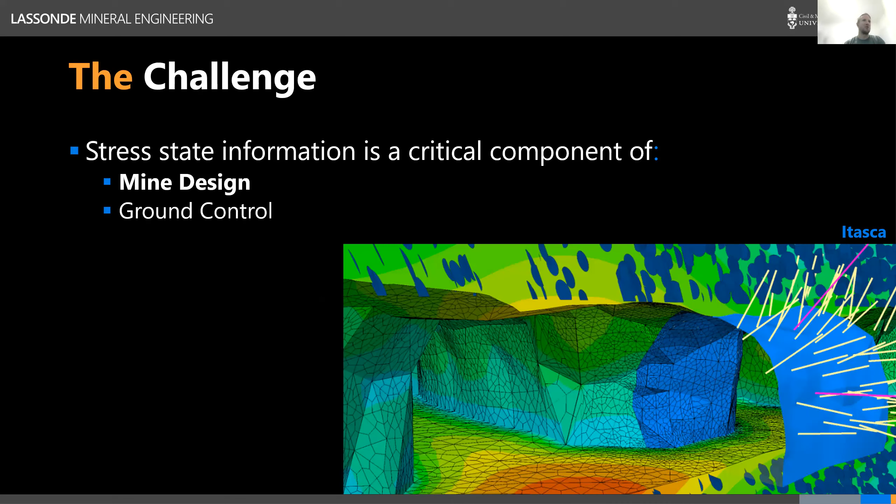So the challenge: stress state information is a critical component of both mine design and ground control. On the mine design side, there are many inputs to numerical models, but stress is a very important one. And you could imagine that the mine that you ended up designing will be very different depending on what the stress state is. On the ground control side, these are images of rock burst events.

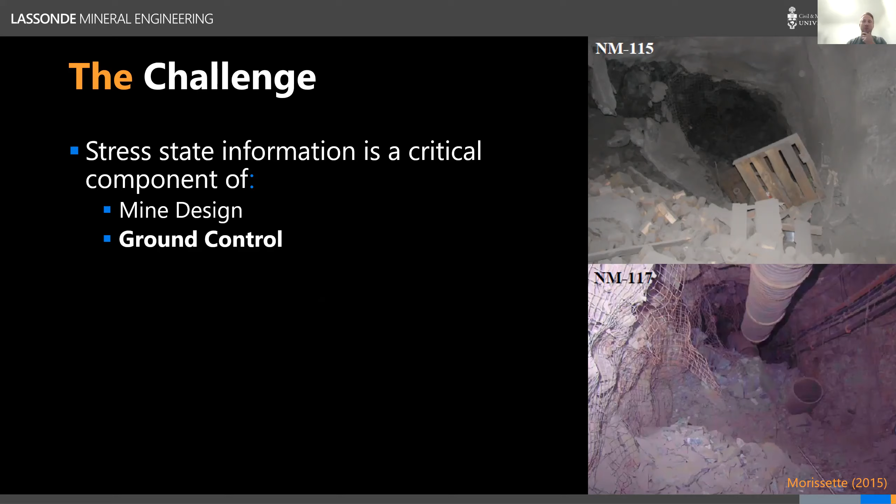So there's sudden and violent collapse of mine infrastructure. And the ground control team is always monitoring available data. This could be microseismic data, extensometer data, making observations and referencing back to the numerical models and trying to avoid these events if possible. And a solid understanding of stress is important for managing these risks to workers in the mine. And stress is traditionally a very challenging property to measure for a few reasons.

One is that it can be highly variable across a volume of interest. So, you might have a far field stress that is compressing a volume of rock, but there are many things that can affect the stress. This could be geological structures, mine infrastructure, contrast in rock type. And so all of this makes it hard to quantify the variability with point measurements.

And a lot of the available methods can have high levels of uncertainty. As I mentioned, they can be sparse, and they can have low levels of success, be time consuming and financially expensive. So probably the standard method is overcoring, which from my experience forms the basis for most understanding of stress in mines that I've worked with.

Another method is the acoustic emission Kaiser effect method. There are two groups out of Australia that do this. And basically what they do is they take a core sample out of the borehole and they drill, I think, 6 smaller boreholes at different orientations out of that core. And then they do uniaxial compression experiments on each of those small cores.

And they measure the cumulative acoustic emission hit rate. And for each orientation, they extract the uniaxial stress where the AE starts to increase more rapidly. And then they put this into an inversion to extract the stress state. I've seen it used at a couple of mines in Sudbury.

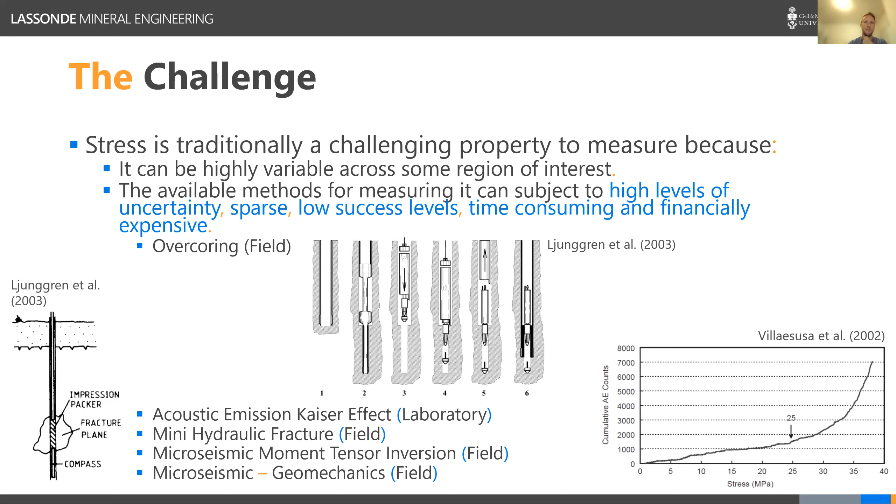One of the big challenges with it is that, as you can see from this plot, it's not entirely obvious where the acoustic emission hit rate is really taking off. And so there's some uncertainty when picking that value. Mini hydrofrac is another method. And then ESG Solutions out of Kingston, I believe they have a method to infer stress from the microseismic moment tensor.

And so this is data from the Underground Research Lab. This was a test site for the storage of Canada's waste uranium in the Canadian Shield in Manitoba. And it was kind of like this really cool underground research lab. And they were working in a fairly small volume of rock, and they were trying to quantify stress. And so this is showing the stresses from 100 overcoring measurements in a relatively small space.

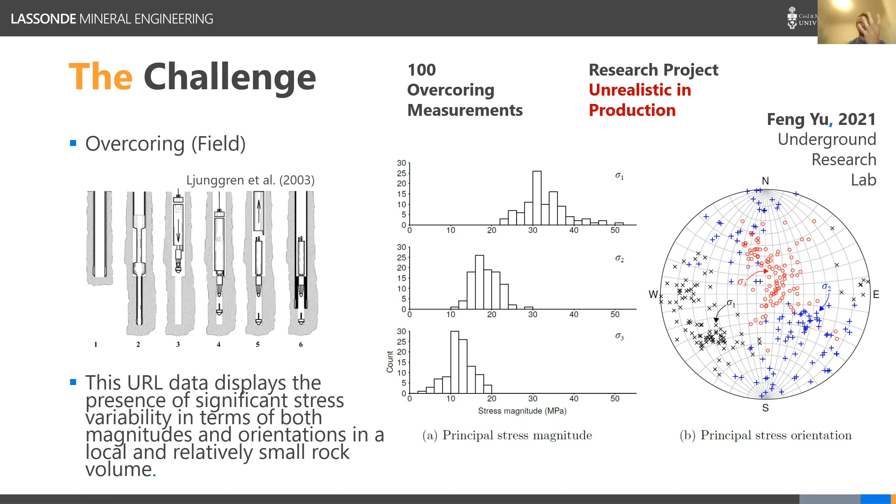And so you can see that there's quite a lot of variability in both the orientations and the magnitudes. And so you could imagine that if you were just picking one overcoring measurement to characterize a stress state in your mine, there might be quite a lot of bias in that measurement. And so this is one of the challenges that we're trying to address. We're trying to address it with ATV data. So I'll talk a bit about what that is.

So ATV data is a type of wireline logging technology. Wireline logging, this is a setup for that. So here you can see the steel casing at the top of the borehole. Usually there's a tripod and there's a winch in the truck. And basically this cable is supporting a probe, which is slowly being lowered down the borehole. The cable not only is supporting the probe, but it is also providing power to the probe and relaying data from the probe back into a laptop that's located in this truck.

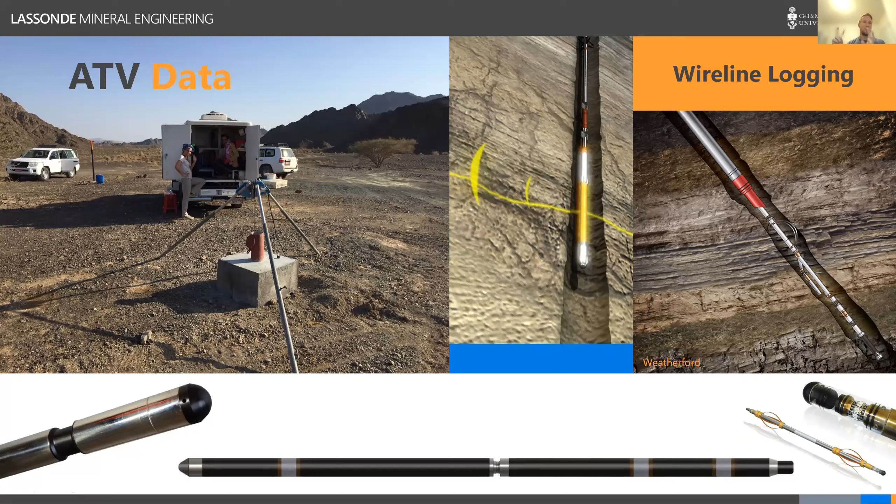Wireline logging is used in the mining industry during exploration, geotechnical logging for mining, as well as in the oil and gas industry. Common physical properties that probes are designed to measure would be resistivity, magnetic susceptibility, gamma radiation, density, and sonic velocity. And there are two types of probes called televiewer probes.

So there is an acoustic televiewer and there is an optical televiewer. And these are images of both of those. And the type of data that they create is shown on the right. So the first two images where it says amplitude 1 and amplitude 2, those are from the acoustic televiewer. And then optical on the right, that's from the optical sensor.

So the optical probe can work in a wet or a dry borehole. And you can see there's little LED lights there that would light up the inside of the borehole. And then you basically just have a rotating camera taking a panoramic image inside the borehole. The acoustic televiewer is using an ultrasonic pulse to image the borehole wall. And so it needs the borehole to be fluid filled.

And on the right-hand side, you can see from the optical, you've seen this vein structure, some fractures, and you can look at it in an unwrapped or wrapped view. And the wrapped view basically just looks like a piece of core. So this would be the mirror image of the core that you extracted from the hole.

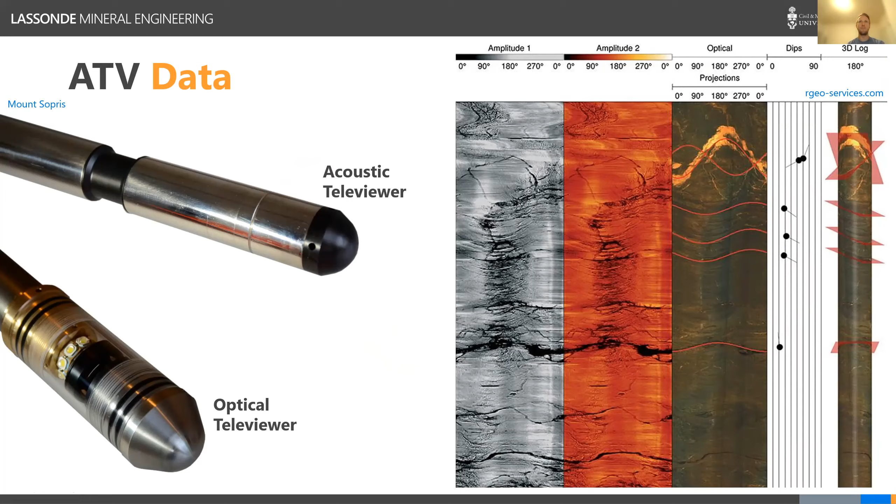For the acoustic televiewer, what it does is it obtains a high resolution oriented acoustic image of the borehole wall and does this by transmitting an ultrasonic pulse, which travels through the fluid, reflects off of the borehole wall, and then that full reflected waveform is recorded by the sensor. This little hole here at the bottom of the probe, that's where the ultrasonic pulse comes out of. And that's where the ultrasonic pulse is recorded. And this rotates 360 degrees at each depth increment.

And so the two features that we generally extract from the raw waveform data is the travel time. So that's how long did it take for this wave to travel through the fluid, reflect off the wall, and come back. And then the amplitude, the maximum amplitude of the reflected wave. And what happens here is that some of the energy from the incident wave is transmitted through the rock and some of it is reflected.

And so if we had a broken out zone of the borehole or maybe an open fracture or fault, this would result in a longer travel time, right? It would take longer for that wave to travel through the fluid and back to the sensor. And as well, we now have this kind of broken out area around the borehole, which is absorbing and scattering ultrasonic energy, which is resulting in a smaller amplitude of the reflected wave. So these are the two ways that we can image these features on the borehole wall.

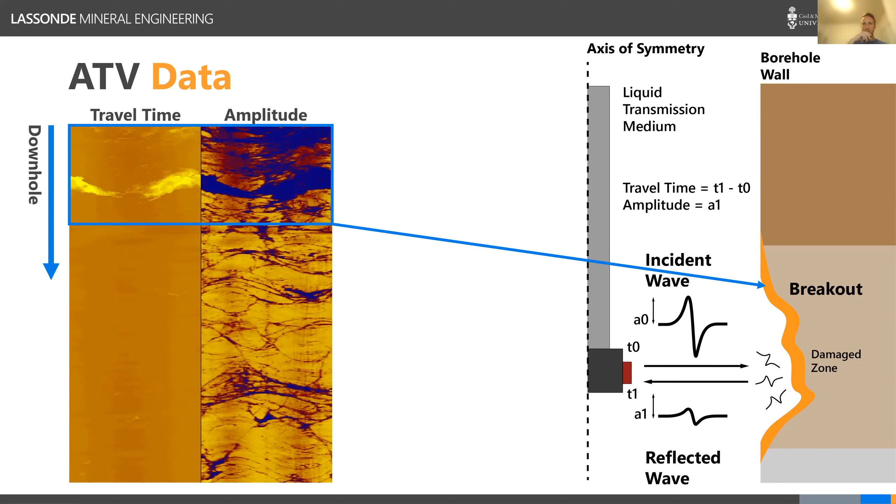And so this is an image showing an open fracture, both in the travel time view and the amplitude view. The more bright yellow areas are longer travel times. And then the darker purple areas are smaller reflected amplitudes. So this open fracture is, the signal is traveling into it, taking a longer time to reflect back. And as well, it is absorbing more energy through different mechanisms of attenuation.

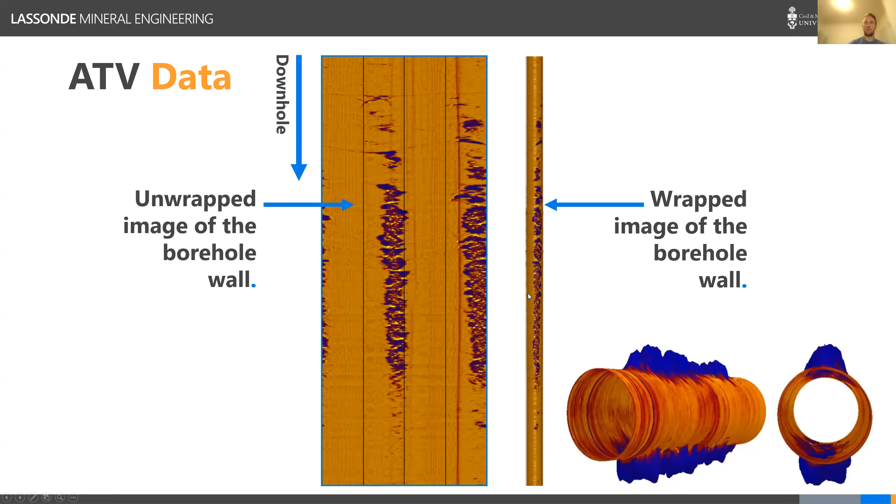So we can view this data in two views. There's the unwrapped view, and you'll see this a lot in the presentation. The y-axis is kind of the depth axis. So the top of the borehole is at the top left corner. The bottom of the borehole is at the bottom left corner. And then the x-axis is kind of the circumferential angle, right? So essentially top left corner is 0 degrees and the top right corner is 360 degrees. And you can look at it in a wrapped view as well. So that's what the raw data looks like in terms of travel time and amplitude.

And what happens is this raw data goes to a company like DGI, and DGI has a bunch of data analysts who will actually extract features manually from these images. So one of the features they extract is the borehole breakout. So this is done by drawing a rectangle basically around these breakout features. So the rectangle will have a distance downhole, it'll have an angle, it'll have a length, and it'll have a width. And this image here is just showing what a breakout would actually look like.

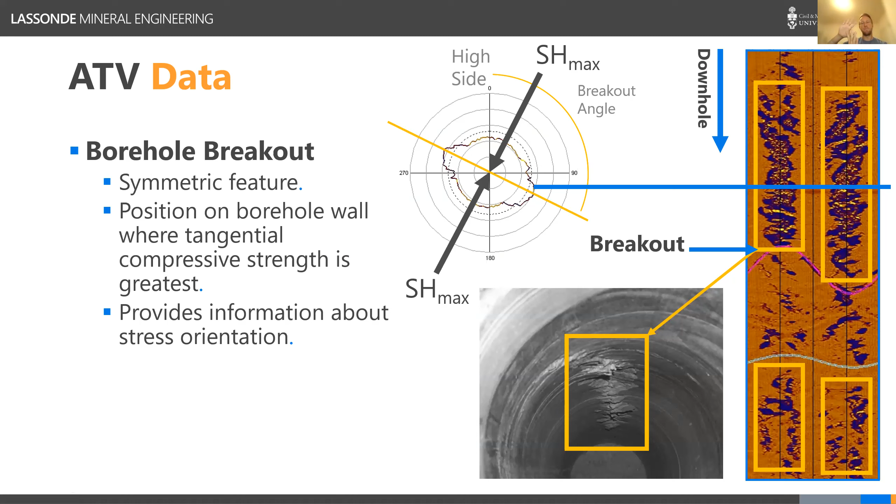And what we see is that these breakouts are typically symmetric, and they are occurring at 90 degrees to the maximum horizontal stress in the plane perpendicular to the borehole. So it tells us something about, you know, the stress relative to that borehole coordinate system.

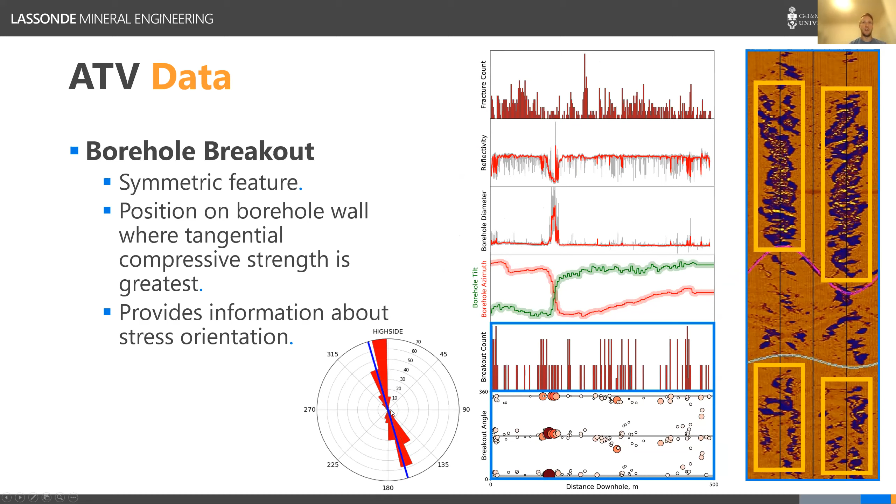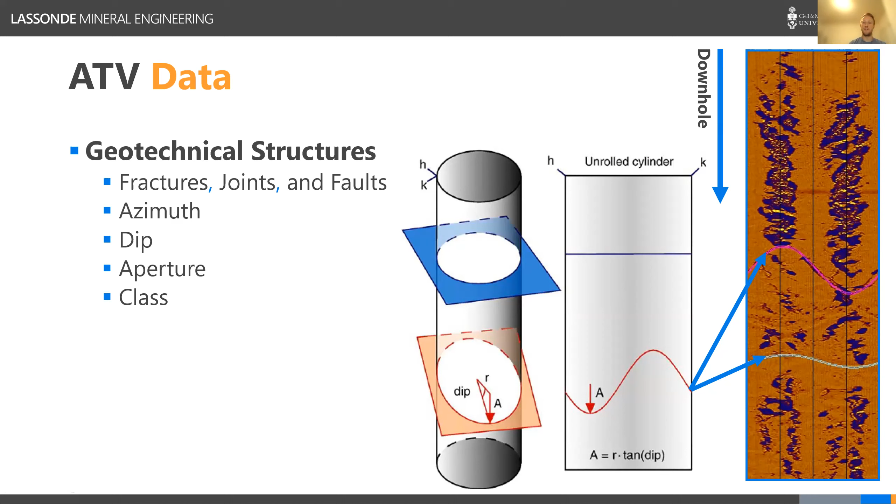Another feature is geotechnical structure, so fractures, bedding, joints, and faults. When a plane intersects a cylinder and you unwrap that cylinder, it's expressed as a sinusoid. And so what the analysts will do using a software called WellCAD is they'll manually fit these sine waves to the breakout features. Because the acoustic televiewer image is oriented, they can get out the true azimuth and dip and aperture of all of these structures.

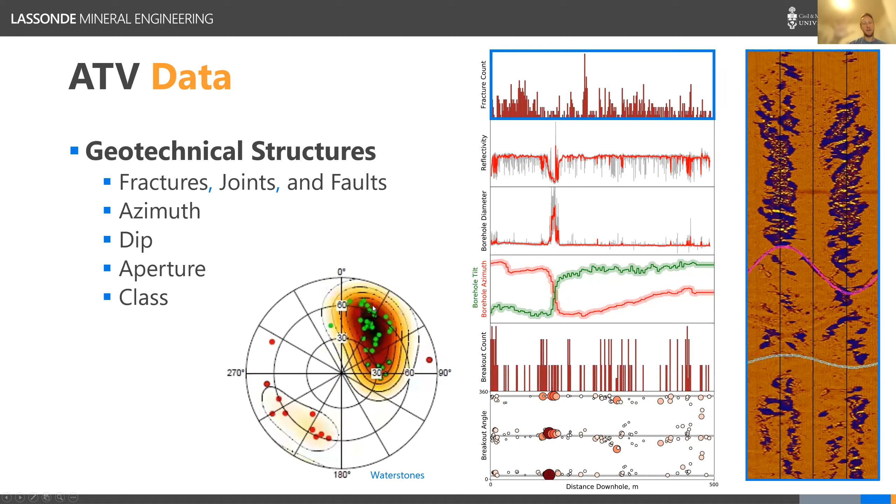And we can look at them in a summary view over the length of the borehole. So maybe I'm looking for areas where there are lots of fractures or not so many fractures. And we can also look at a polar or Schmidt plot to see if there are any dominant trends across the data set.

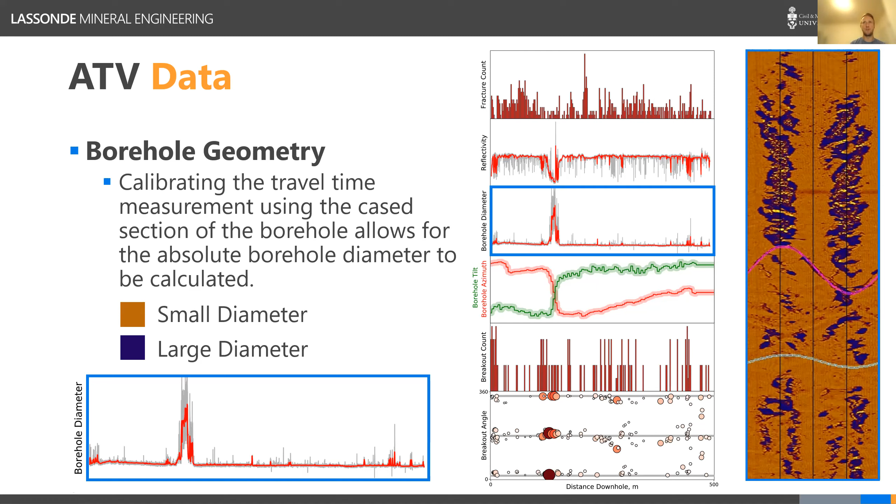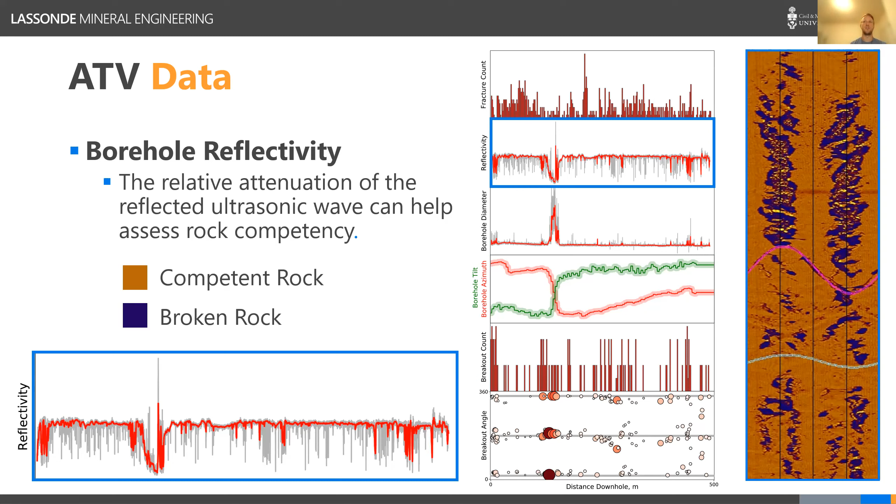Reflectivity is basically at every depth point, they just take the average of all of the amplitudes around all 360 degrees. Competent rock would be the brownish colors, broken rock would be the purple colors. And again, we can use this to look for areas where the borehole is significantly broken out and is absorbing a lot of that ultrasonic energy that the sensor is transmitting towards it.

And lastly, there's just the survey data. So all these probes are measuring the tilt and the azimuth of the borehole. Azimuth is relative to magnetic north, and this can be problematic if the deposit is highly magnetic. So we typically don't use the trend data that's collected on the ATV. Typically, we'll use the gyro data that's collected by the mine.

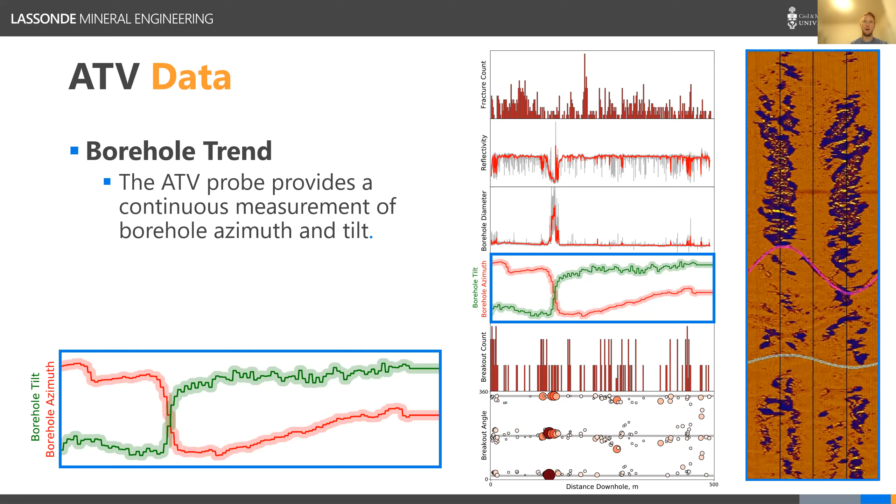And so why are these companies collecting ATV data today? Well, one of the reasons is they want to validate the fracture orientations that they get out of their geotechnical core logging using oriented core. So there's a method to orient core so we can understand what the orientation of this core sample was when it was in the ground. And these red strike lines indicate some kind of known orientation.

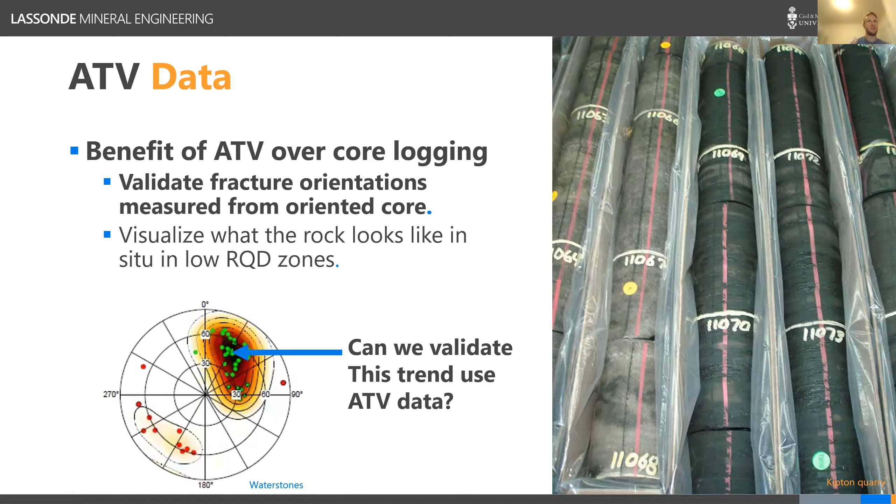The challenge is that this method can have some error. So let's say the core snaps off and it's spinning in the barrel, or there's some kind of human error when they're putting this line on it. Oftentimes, the mining companies will want to validate these orientations that they're getting out of their core logging. So they'll log some holes with ATV, because it is oriented, to do that validation.

So what's the special opportunity that's available right now? There are a few major trends in data collection and technology adoption in the mining industry right now.

So the ATV technology has been around for a very long time. When I was at Kore, I did kind of an analysis with DGI, and we just wanted to see what the adoption was of this technology. And so we determined that since 2014, with respect to DGI's business, there was an 8-fold increase in the collection of ATV data, to the point where it makes up the majority of the business that DGI does currently.

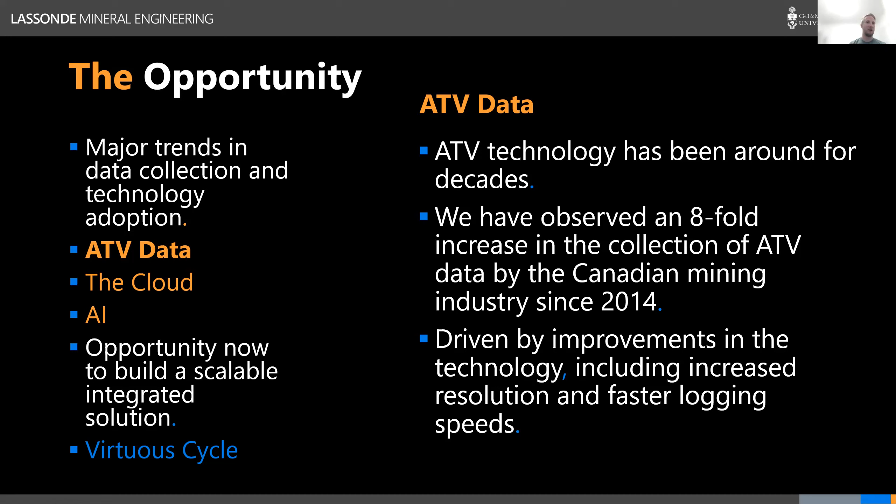And this has largely been driven by improvements in the technology, so better resolution, faster logging speeds, and as a result of faster logging speeds, a reduction in the cost. The cloud, I'm sure you're all familiar with it, but it's basically on-demand availability of compute resources like CPUs and GPUs, data storage and deployment infrastructure.

And 5 years ago, I'd say mining companies were hesitant to adopt cloud technology, but all the cloud providers have addressed a lot of the security concerns that they had. And most major mining companies are on one of the three, so GCP, AWS, or Azure. And lastly, AI is a very popular topic, and we see applications of it all around us. But mining has been slow to adopt it.

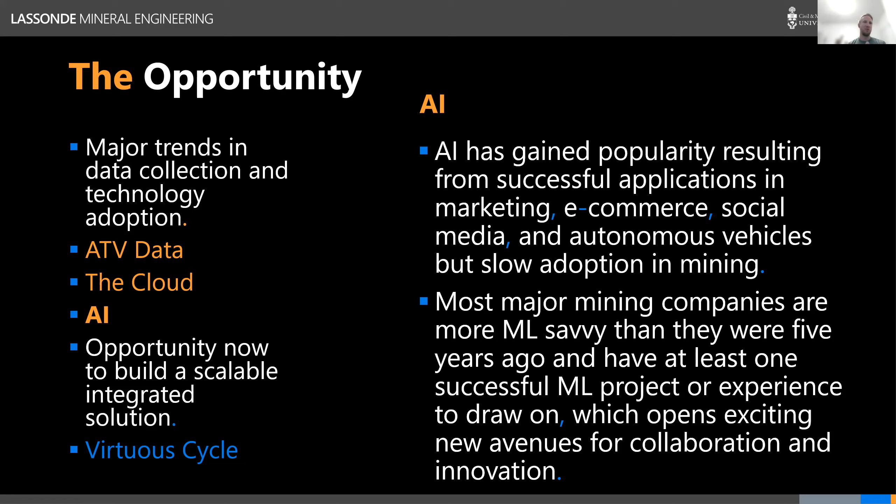However, today, I would say that most major mining companies are much more machine learning savvy than they were 5 years ago when I entered the space. And I think that's because they have at least one successful application they can draw on, and they have many more unsuccessful applications. So they understand the value it can bring, how to evaluate the business value of the technology. What are the right applications? What are the wrong applications? So they're much more willing to adopt a technology solution that uses AI.

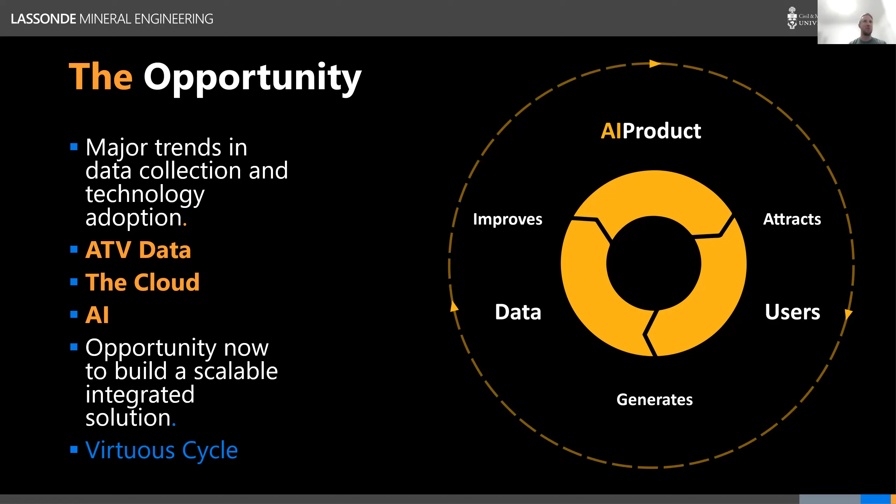And so these three things set up what in the AI product space is called the virtuous cycle. This is where we might start off with a small data set to create a product. This product attracts some users. Those users create some more data. More data means a better product. A better product means more users, which means more data. And you can see how this kicks off. And I think that this is now possible in this space, given these trends that have emerged over the past few years. So with this technology, where are we right now?

So we've developed a commercial solution that works with acoustic televiewer breakout data and tries to estimate the stress in deep mines and capture some of the variability. The method is currently outputting the principal stress orientations and providing some constraints on relative magnitude. And the method was adapted from a PhD dissertation by Zajac. He was working with breakout data as well, but he was inferring it from a four-arm caliper, and he was working on very deep exploration holes in Central California.

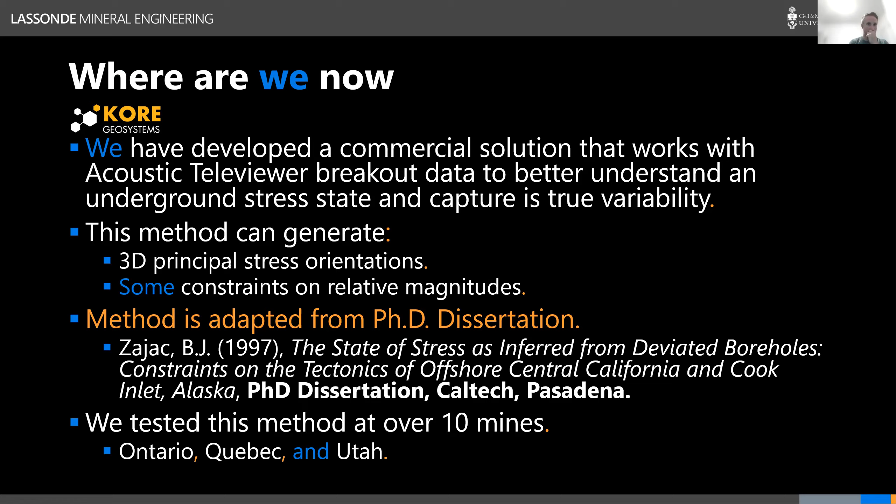So since 2016, we've run pilots of this technology at 10 different mines, mainly in Ontario, Quebec and Utah. So the basic workflow is that we have some volume of rock and we have a bunch of boreholes that are intersecting that volume of rock. We would ideally like this volume of rock to be smaller, and we would like it to be far away from geological structures or mine infrastructure, so that the stress state is not being perturbed.

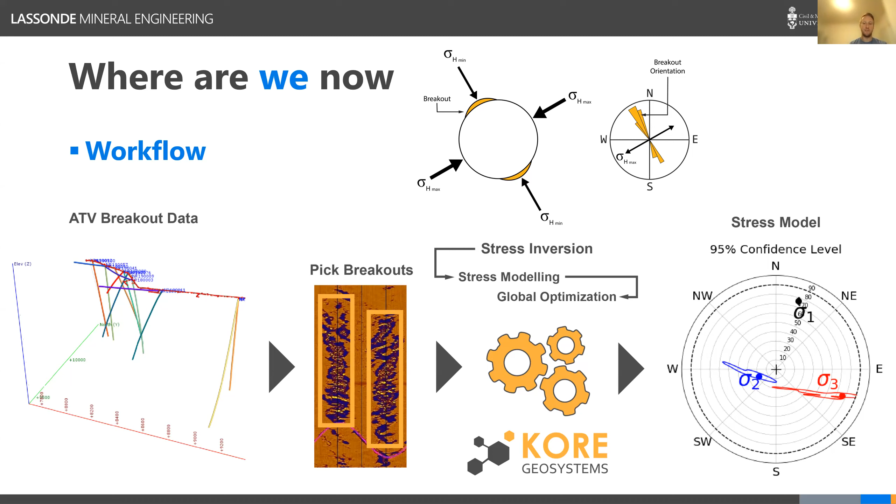The data is collected on those holes. The analyst will pick the breakouts, and then these breakouts will go into this stress modeling workflow, which will then output the orientations of the principal stresses and try to provide some confidence intervals as well. So there's a lot of data visualization in this talk, and this is one plot you'll see a lot, so I thought I'd just explain it.

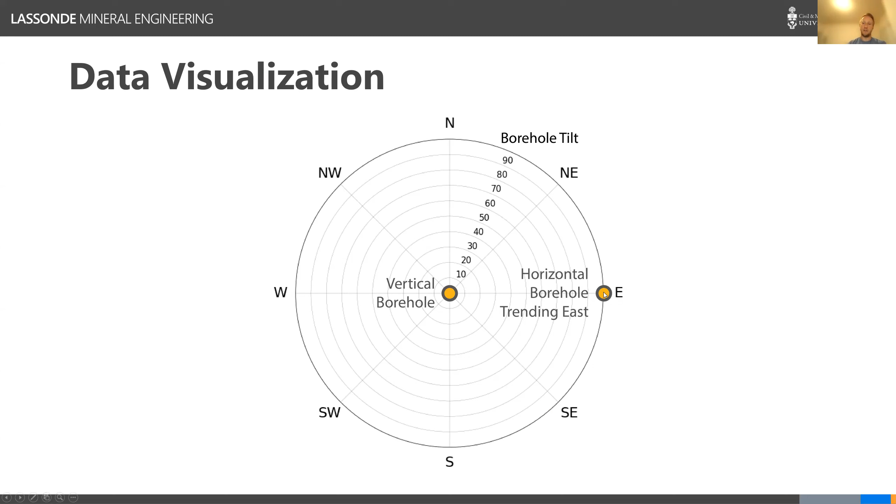This is a polar plot, and so the circumferential dimension is the azimuth. You can see northeast, southwest, and the radial dimension is the tilt of the borehole. So a vertical borehole has a tilt of 0, so that's where you see a little dot in the middle, and a horizontal borehole trending east would be this yellow dot on the right. And so that plot can show the orientation of the borehole.

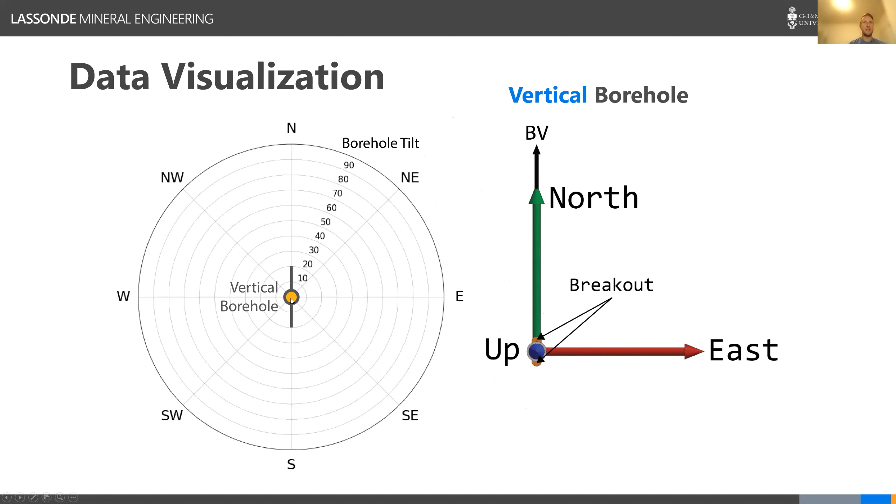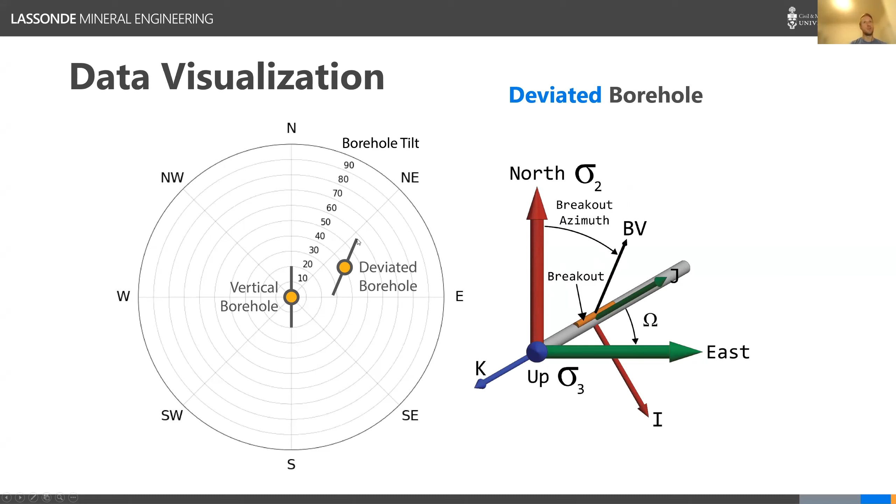So now we're seeing the trend of the borehole and the trend of the breakout. If I had a deviated borehole, so maybe this borehole has an azimuth of 55 degrees, and you can see the breakout vector on this gray borehole here. So if we project that breakout vector onto the northeast plane and we measure the azimuth, that's what we're plotting here. So here we're showing the orientation of breakout on a deviated borehole.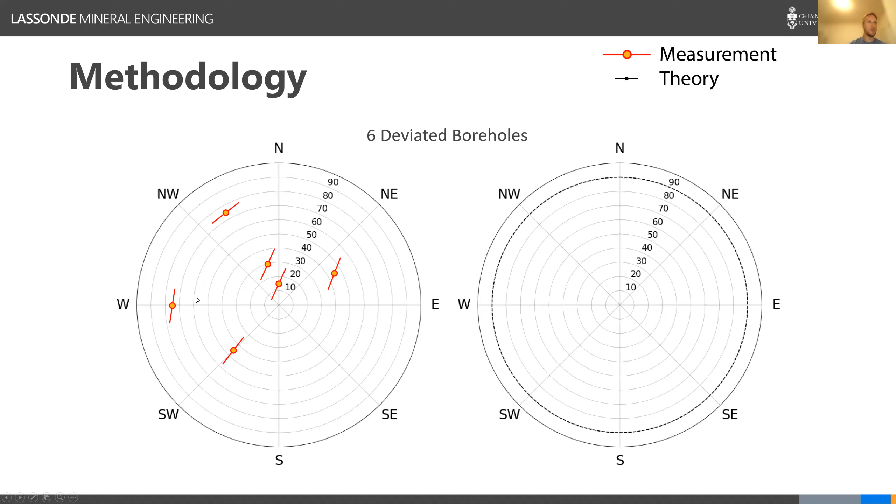And so the way that this method works, I created a dummy data set here. So imagine we have 6 boreholes across our volume of interest, and the little yellow dots indicate the average trend of those boreholes, and the red line indicates the average trend of breakout on those boreholes. So we have a couple boreholes in the middle. Those are like vertical boreholes, and we have these 2 boreholes out here. Those would be kind of near horizontal boreholes.

And what we do is we parameterize a stress tensor with 3 Euler angles and a stress ratio. And if we kind of randomly picked 4 values here, we would get a stress state. So here's our stress state showing sigma 1, 2, and 3. And on the plot on the left, I'm just showing a black dot. I kind of created a grid of possible borehole orientations. So every black dot is basically an azimuth and a tilt of a possible borehole orientation.

And what I did is I said, given those borehole orientations and given this stress state on the right, where would we expect breakout to occur? And that's what the little black line shows. And it's a very simple model. It's assuming the volume of rock is homogeneous, isotropic, and linear elastic, and just looking for the maximum tangential compressive stress around the opening of the borehole. And then projecting it on the northeast plane, that's what the little black line is.

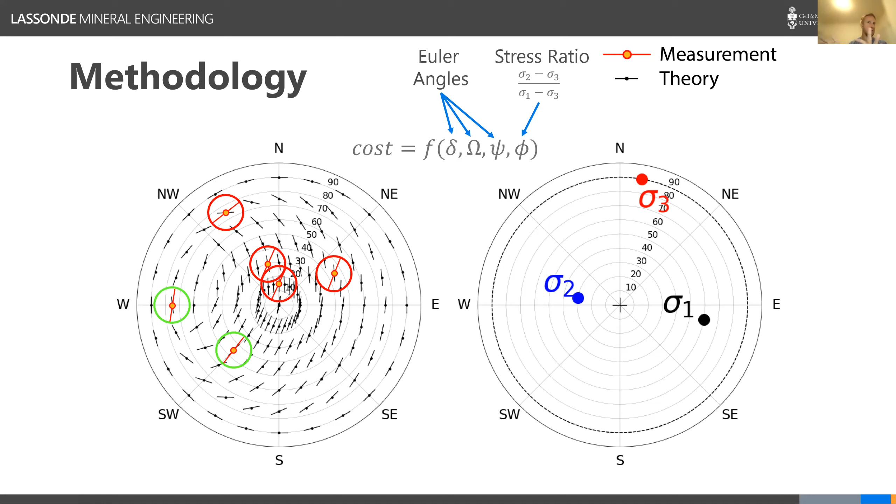And so what the method is doing is basically going to calculate the theoretical breakout orientation at all of our observation points, and then doing like a cost, right? Like an angular residual. How good a fit is this? And so here we can see that where the green circles are, that's a relatively good fit. The red circles, it's not as good a fit.

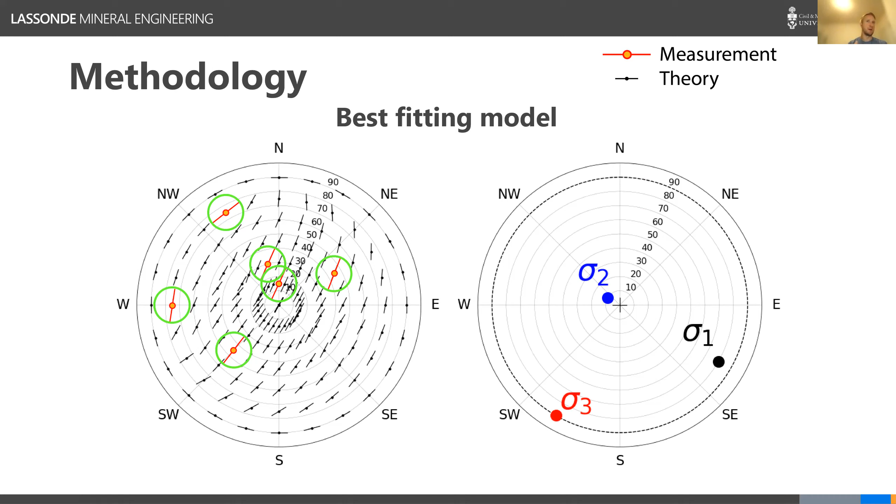So we kind of just iterate through using a global optimization algorithm called basin hopping until we converge on the global minimum. This stress state here produces theoretical breakout orientations at our 6 observation points that best match our observed breakout orientations. And so I have a case study here.

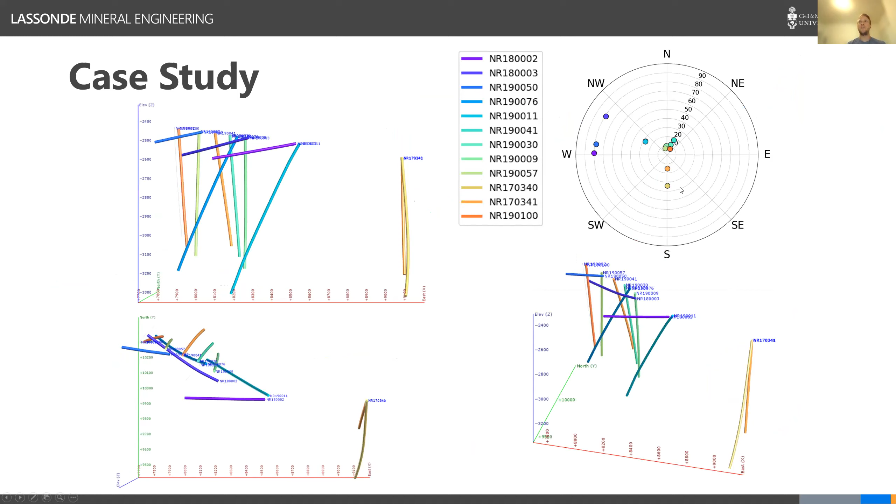And they would put them out in advance of the tunnel face, do core logging, do ATV logging, and then ESG would put an accelerometer at the end of them. And they're doing this to try to probe this unknown area, because they're venturing to new depths greater than 2 kilometers and a totally different section of the deposit where they've never been before. And so you can see here, most of these boreholes are vertical, and then here are the 3 scout holes.

And so 12 boreholes, that was quite a lot of breakouts that got picked from the ATV data. And what this plot is showing is basically a little green dot showing the orientation of the borehole at a particular breakout pick. And then the red line is showing the breakout azimuth. So that's the trend of the breakout at that pick. So you can see that there's a lot of variability in the breakout orientation.

And as well, some of these boreholes change their trend, right? So borehole number 1 here, you can see the azimuth is changing, right? So it's kind of winding towards north, whereas borehole 11 is relatively linear.

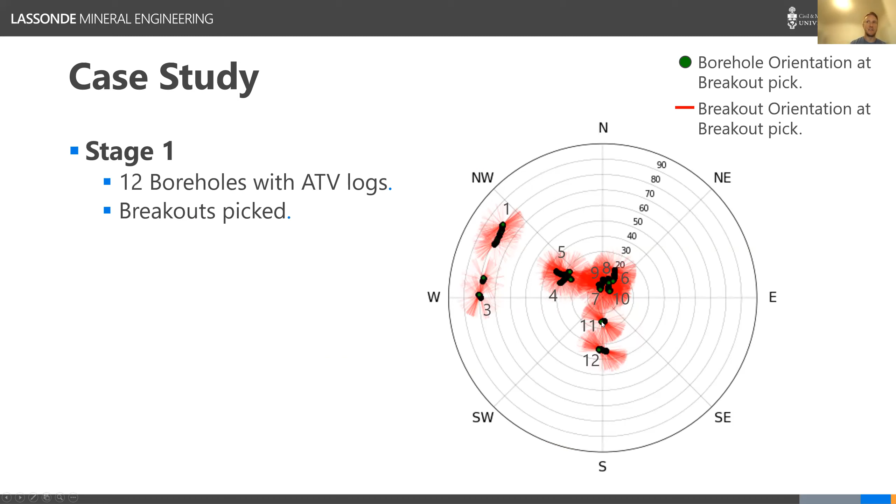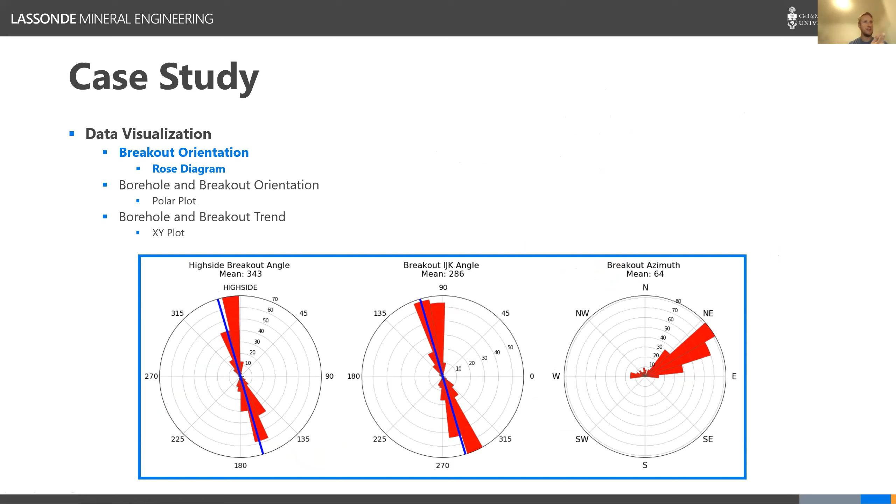So the first thing we did is just try to visualize all this data. There's lots going on. And so this is the data from one of the horizontal holes. So we did just basic angular histograms to determine what is the trend of the breakout. We also looked at the trend of breakout and the trend of the borehole as a function of the distance downhole.

So the x-axis here is, on the left-hand side, 0 would be the collar of the borehole, and about 450 meters, that would be the end of the borehole. And this plot on the bottom is a scatter plot, where the y-axis is just the high side angle. So you can see there's a clear symmetric trend here for the breakout.

And the radius and the color of these little circles is related to the length of the breakout section. So larger, darker red circles are longer sections. So that darkest point there is about a 7-meter continuous section of breakout that was picked. And so when we calculate the average orientations for each borehole, which is the dark gray line, we are weighting that average by the breakout length.

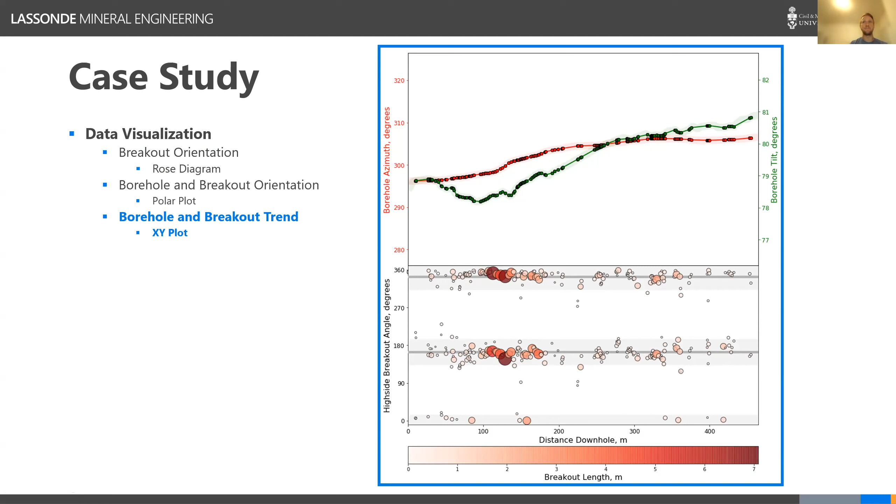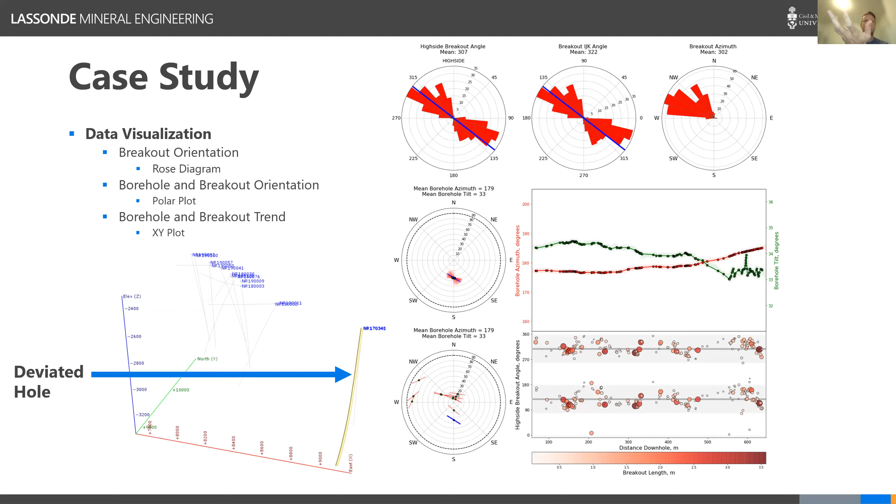So we can visualize this data. This is for a horizontal scout hole. This is for a vertical hole and another vertical hole. And so there's clearly trends there, but there's quite a lot of variability around those means. So what we did initially was we calculated the weighted average breakout orientation for each borehole. So that kind of simplified the picture, moving into this view on the right-hand side. And that's what we tried to fit our model to.

And so we run that kind of optimization process, and what we get is the best matching stress state. So this is our best matching stress state here, sigma 1, 2, and 3. And on the left-hand side is that grid of possible borehole orientations, and then the red lines are observed orientations from our 12 boreholes.

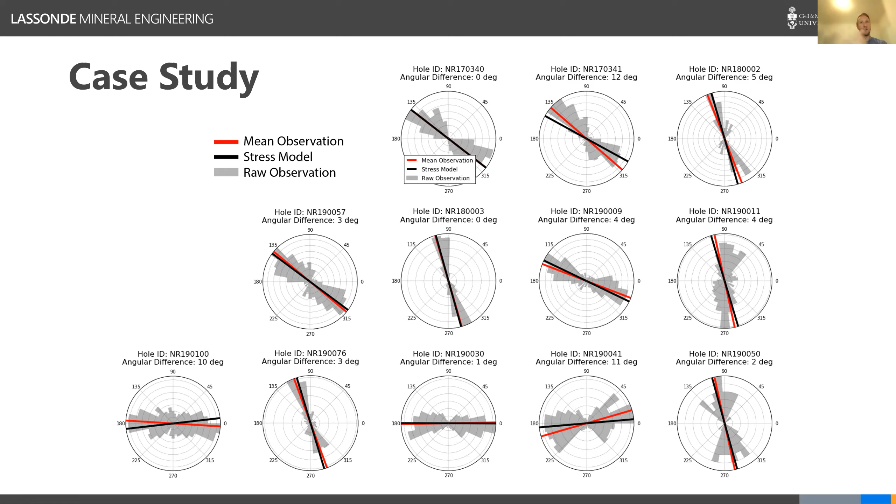On a per borehole basis, this is kind of a plot to just assess the goodness of fit. The gray histogram is the raw data. The red line is the weighted average that we're trying to fit our model to. And the black line is the best fitting model. So basically the optimization is trying to minimize the difference between the red line and the black line across the 12 boreholes.

The next thing we did is that, as you saw, there's quite a lot of variability in this data. And so we wanted to try to quantify it better, as opposed to just reporting one stress state to the client. So what we did is we ran hundreds of simulations of our stress inversion, and each time we added a bit of angular noise to those weighted averages. So the weighted averages are the red lines, and then the blue lines are those weighted averages plus a bit of random noise, and just ran this over and over again to try to map out the objective space a bit better.

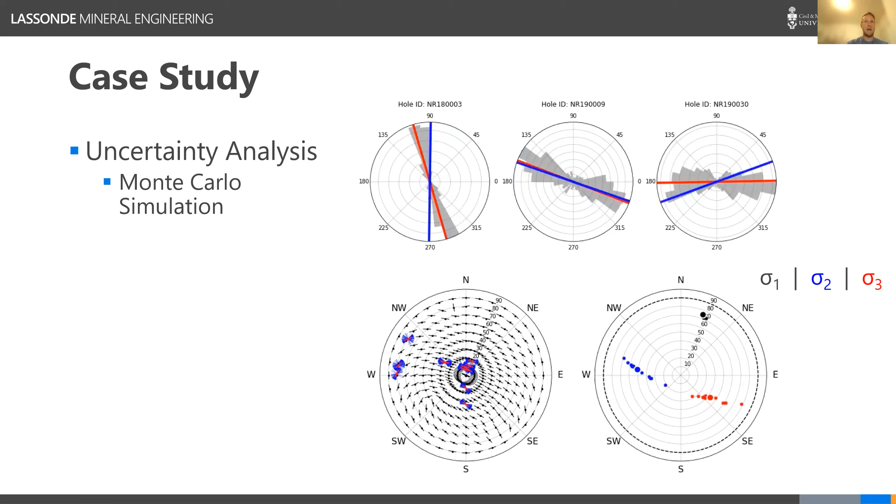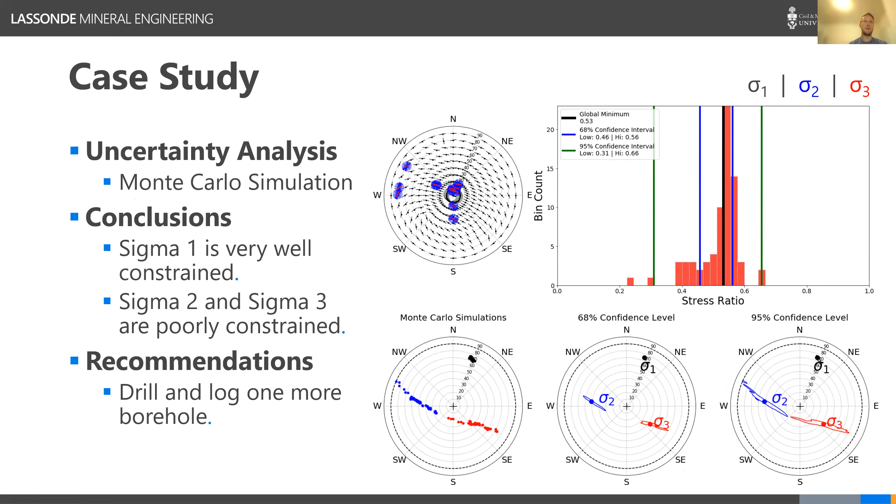And so when we did this, we saw that sigma 1 was relatively well constrained. It wasn't moving much, and it was always coming out as a horizontal stress. But you can see that sigma 2 and sigma 3 were kind of freely rotating, and either one of them for any particular simulation could have been the vertical stress. So we made a recommendation to the company to log another hole.

And so they asked us, where should we drill another hole? So what we did is dove back into the Monte Carlo data and tried to see where there was the most variability in breakout orientations. And the idea here was that if we look at some of these regions over here, like horizontal holes to the northeast, if we had drilled another hole there, we wouldn't expect that observation to help better constrain the model, because even when adding in all of this angular noise, we don't see a lot of variability in that zone.

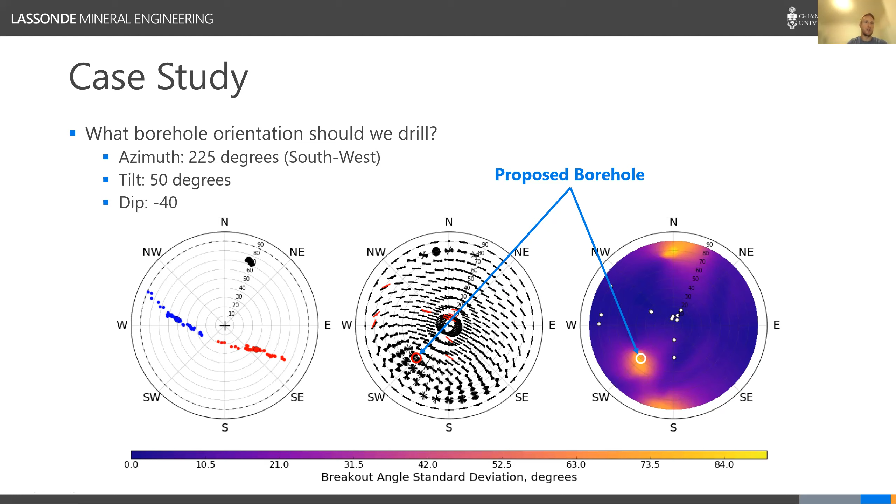So we did a heat map and we proposed these 3 areas where there was the most observed variability across our simulations. And we said, choose the orientation that aligns best with your drill plan, because they were doing a lot of drilling for ore delineation. And they ended up choosing this one here. So that's the new borehole that they drilled and logged.

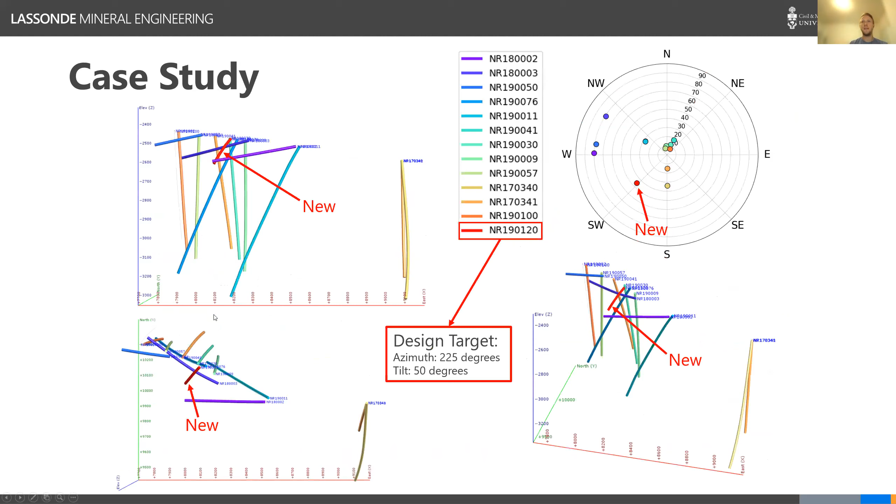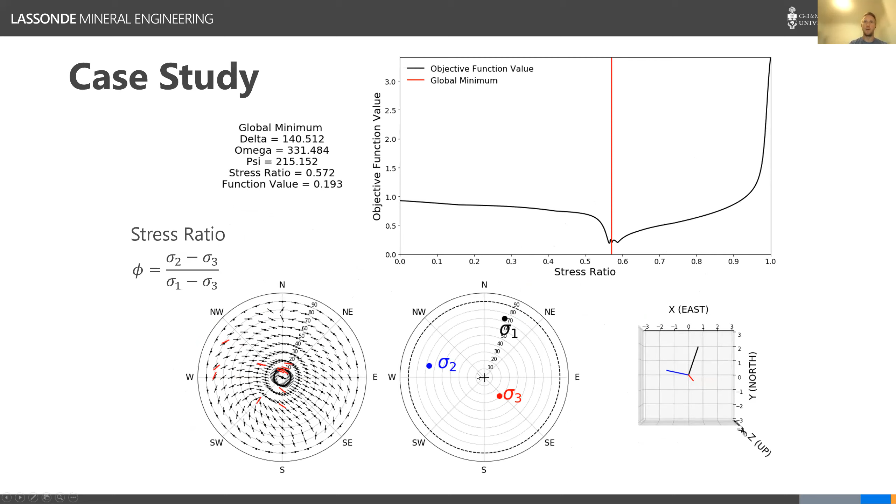And that's it there. And there's our new data point, right? So we have this southwest azimuth and a tilt of 50 degrees. So we rerun the optimization. And again, we see something similar. You see sigma 3 has moved closer to vertical. Sigma 1 has not moved. And that's our new borehole.

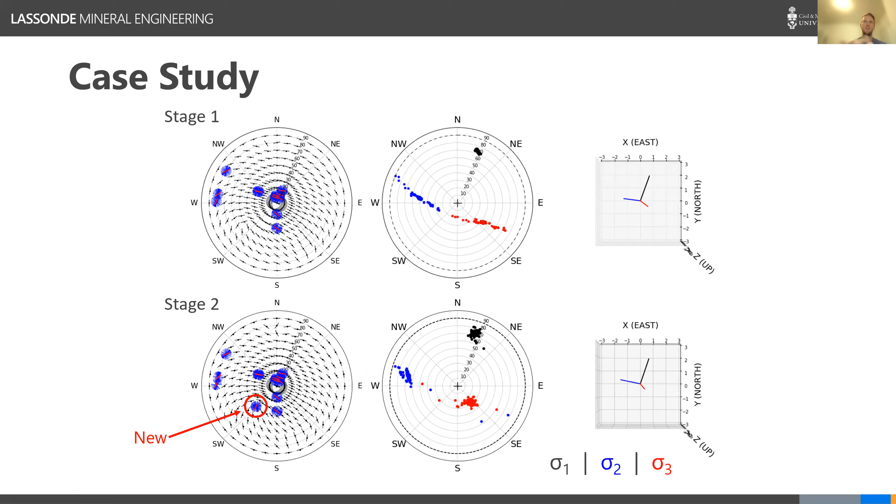And when we compare the Monte Carlo simulations from our initial 12 boreholes to our second stage, where we added that 13th borehole, where we chose the orientation ourselves, we can see that we've kind of stopped this issue of the rotating stress states. And sigma 2 and sigma 3 are better constrained than they previously were.

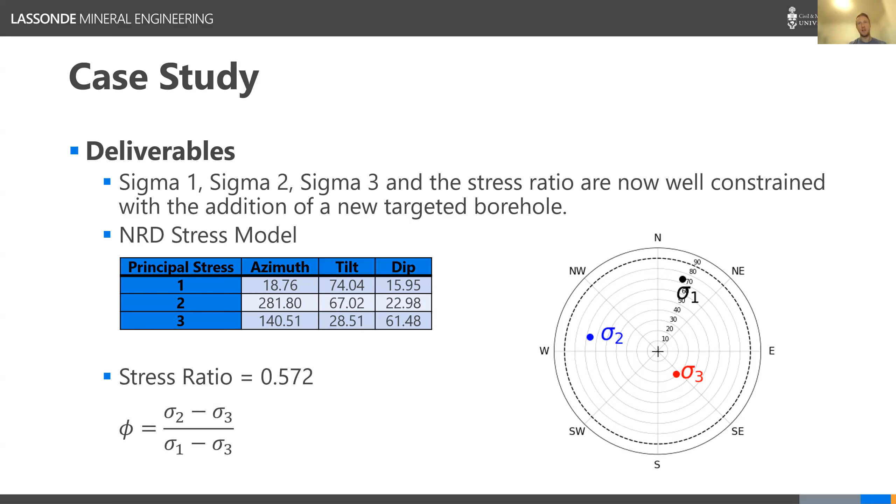So the deliverables here were just these principal stress orientations and the stress ratio. So we gave that to the client and we stopped all of our model development. We did this because we wanted to try to do this in isolation, not really understanding what they thought the stress was in their mind, trying to be as unbiased as possible.

So once we submitted our final stress state to the client, we then went and did some external validation and some internal validation. External validation was looking at some of the world stress map data from the Sudbury Basin. And the internal validation was looking at microseismic observations, comparing with their existing stress state, discussing with the ground control team about what they thought the stress state was. And then there was another company called Beck Engineering that at the time was doing their own independent assessment of stress at the mine. So we had that as well to compare to.

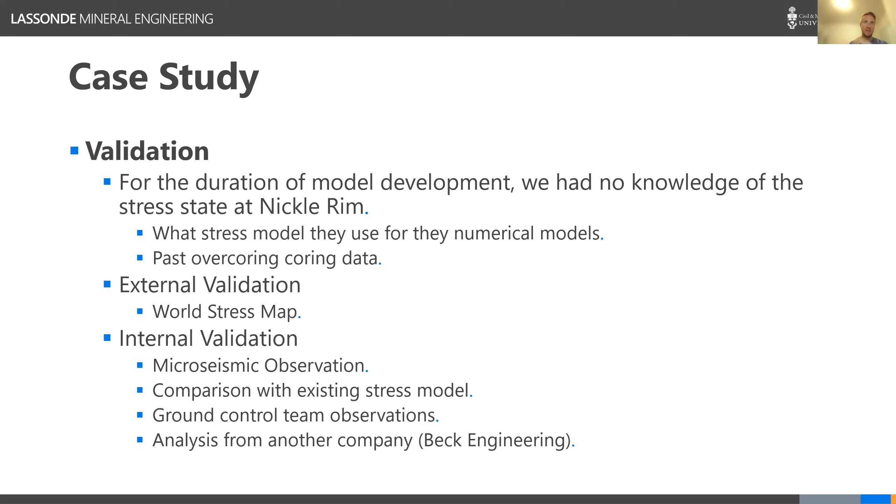So we went to the world stress map and grabbed the data from the basin. These green data points are all the overcoring measurements from the world stress map, showing a northeast trend. This magenta data is from a publication that I found from Craig Mine, where they were using the acoustic emission Kaiser effect method. They had, I think, about 10 tests.

The red line over here, that's our stress state for the Nickel Rim Depth project. And in blue, that's Beck Engineering's stress state for Nickel Rim South. And interestingly, the old legacy overcoring measurements that were done at Nickel Rim Mine are actually here, about 90 degrees out from both the assessment done by KORE and by Beck Engineering. Now, this wasn't what the ground control team thought the stress state was. They thought it was wrong, but they only had these legacy overcoring measurements to go off of. But it was inconsistent with the observations they were making at the mine.

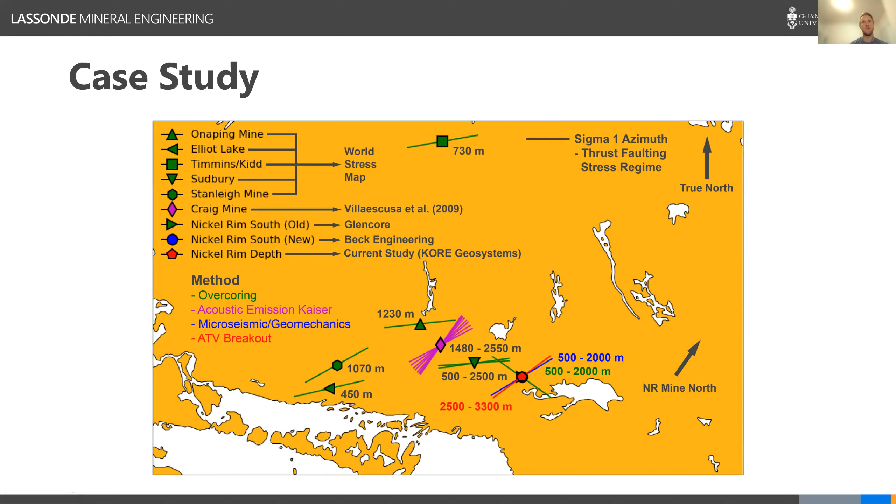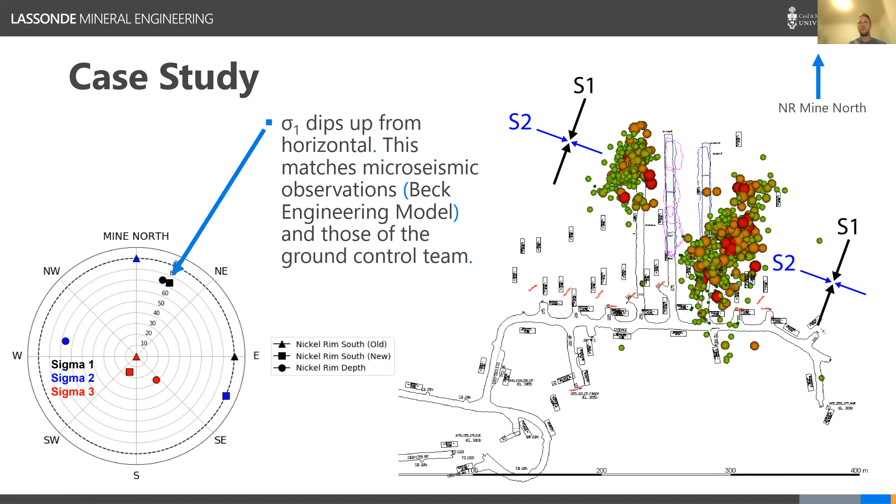We also pulled all the microseismic data from ESG and plotted it up. And here you can see the microseismic activity is happening along the axis perpendicular to what we said was the maximum horizontal stress of sigma 1, which validates the model in a way.

Another interesting thing that came out of this was we were working with a similar data set at the same time, doing the same thing at Onaping Mine, which is just across the Sudbury Basin, also owned by Glencore. Onaping was doing the same thing, with these horizontal scout holes and logging the ATV data. And they observed this rock burst. This is an actual image of a rock burst at Onaping.

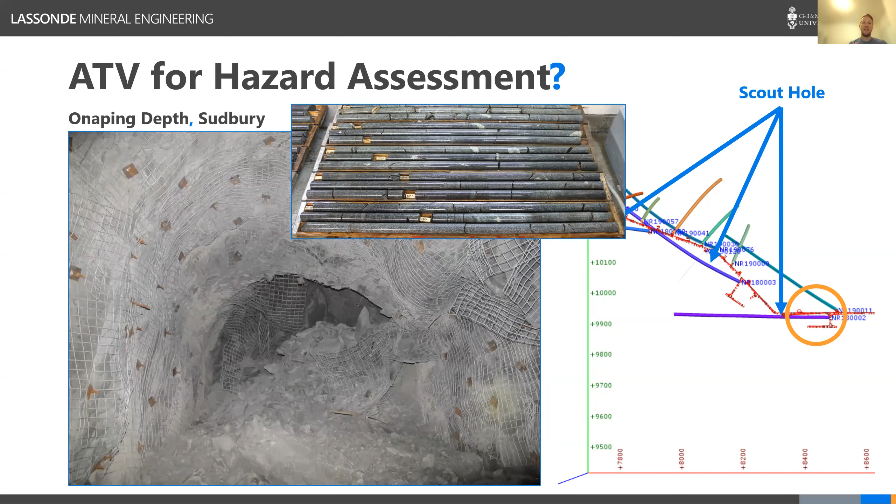And they thought to go back into the core photography and look at what the core looked like in this region. So that's the core: some mechanical breaks, natural fractures, no disking, good recovery. Then they asked us to go into the ATV data, because the ATV data went right through this volume where the rock burst eventually occurred. And this is what the ATV data looked like.

This big drop in reflectivity, this big increase in the borehole diameter, was at the exact point downhole where that rock burst eventually occurred. And interestingly, the borehole actually deviated when it was being drilled as it went through this section. So this observation of anomalous data in the ATV record is supporting some further work that we're proposing.

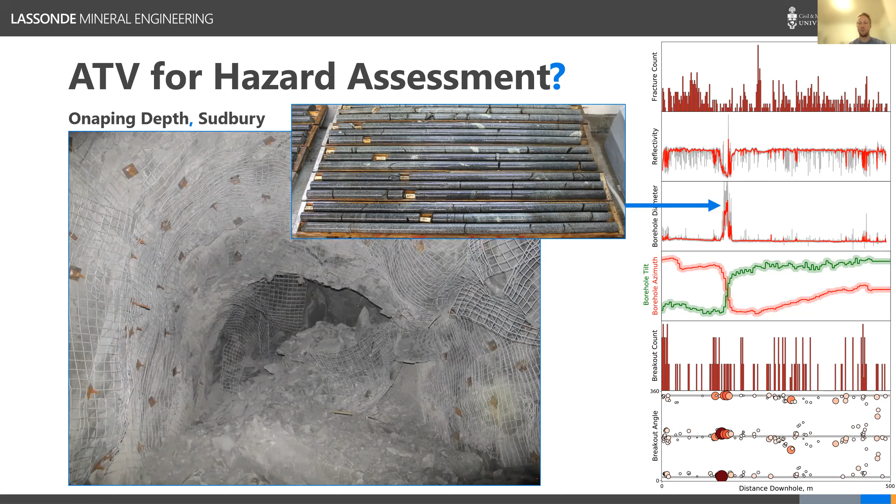So what's next? I think the first thing is we need to address the manual processing of this data. It's probably one of the largest barriers to the widespread adoption of ATV data. You could imagine tens of boreholes, thousands of meters of ATV data, thousands of fractures and breakouts.

It takes a human analyst a long time to process that data. And so there's a delay between the time that the data is acquired and when the final processed results are delivered to the client. But this task is relatively straightforward, right? You're fitting sinusoidal features to fractures and you're drawing boxes around breakouts.

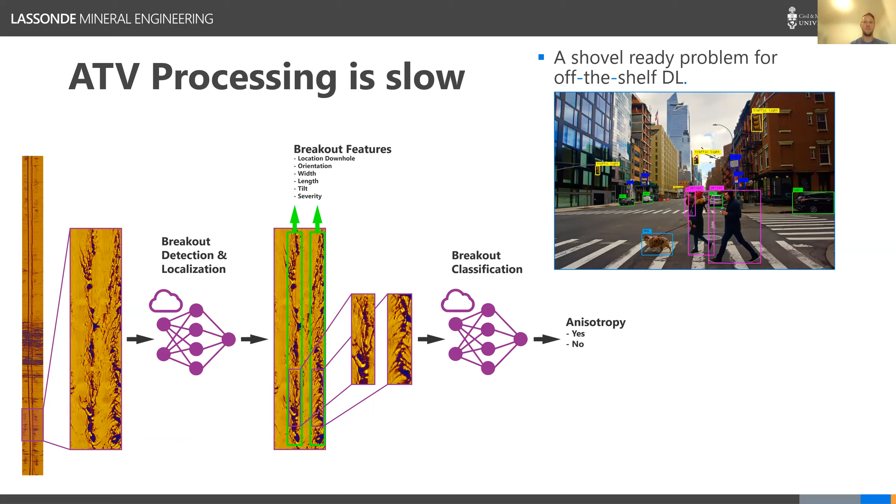And so, just taking technology that is readily deployed in self-driving cars at the moment, like a Tesla, for detection and localization, classification and segmentation, adopting those state-of-the-art technologies and applying them to this problem where we actually have quite a lot of labeled data because this is being done manually at the moment. This would speed up the process, meaning that minutes after this ATV data was collected, you could have the processed results and a stress interpretation available.

The problem with this is that rock bursts are very rare events. And rarer still are ATV data that's co-located with a rock burst. There's actually only one example that I know of, and you're looking at it. So this would result in an incredibly imbalanced data set. 99.999% of the ATV data is unassociated with a rock burst.

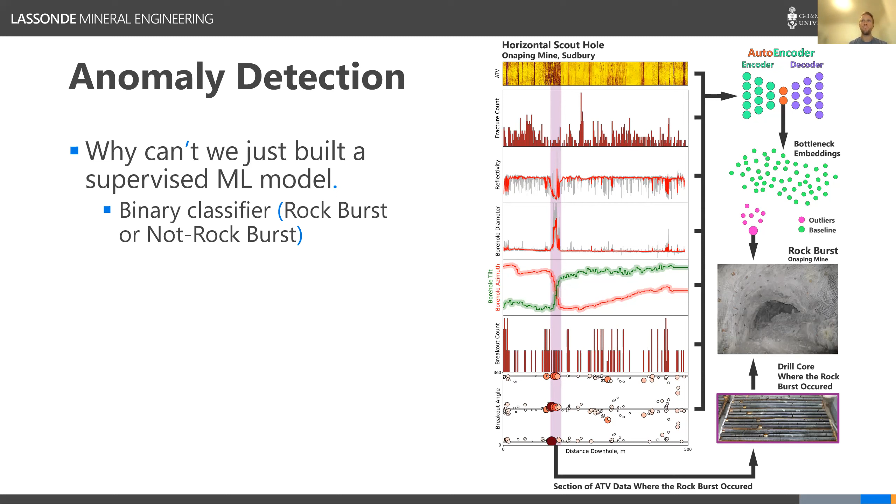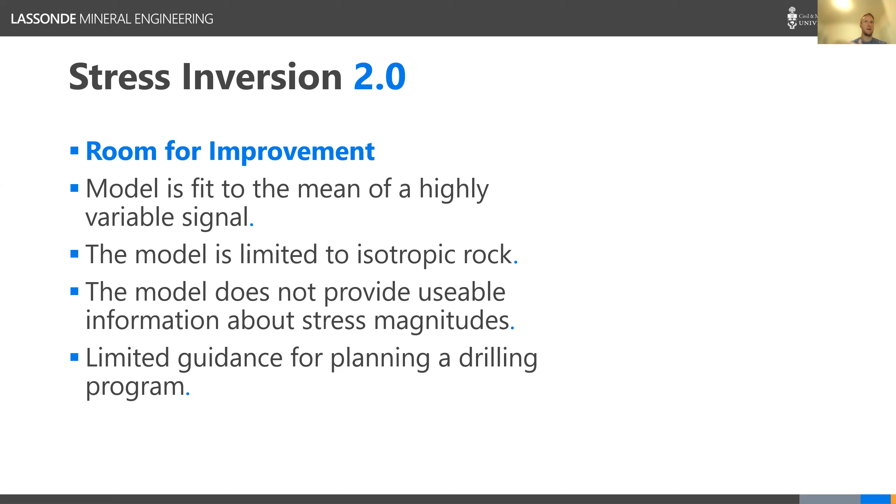And so we're proposing this new workflow. Parts of this are being worked on in collaboration with John Harrison, who's a professor at U of T, and we have a student named Leo, who's going to be tackling some of these problems. But I think first we're trying to apply Bayesian statistics to better quantify the uncertainty in these stress states.

Try to build out a module for drill plan proposal. So we could say, this is where you should drill your holes, this is how long they should be in order to have the best chance of constraining your model, and also doing it iteratively, so updating the drill plan based on what we observed from previous holes. Try to provide some constraints on stress magnitudes. I don't think we're going to be able to output stress magnitudes, but perhaps we could provide some upper and lower bounds for some of the components.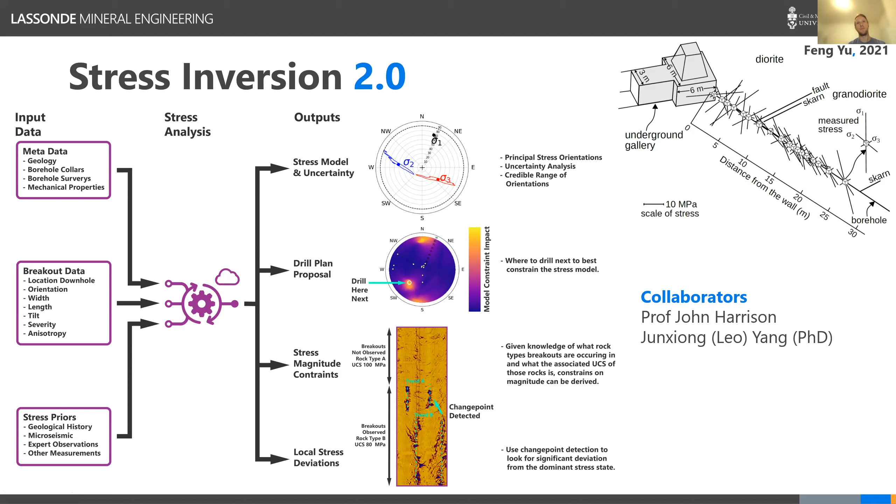And lastly, getting back to the opportunity, we really want to create an integrated system. So, the moment that this ATV data is collected and ends up in the cloud, it's automatically processed and a preliminary stress model is presented, and then further tuned by an analyst. That would be kind of the desired outcome and what we're, I think, working towards.

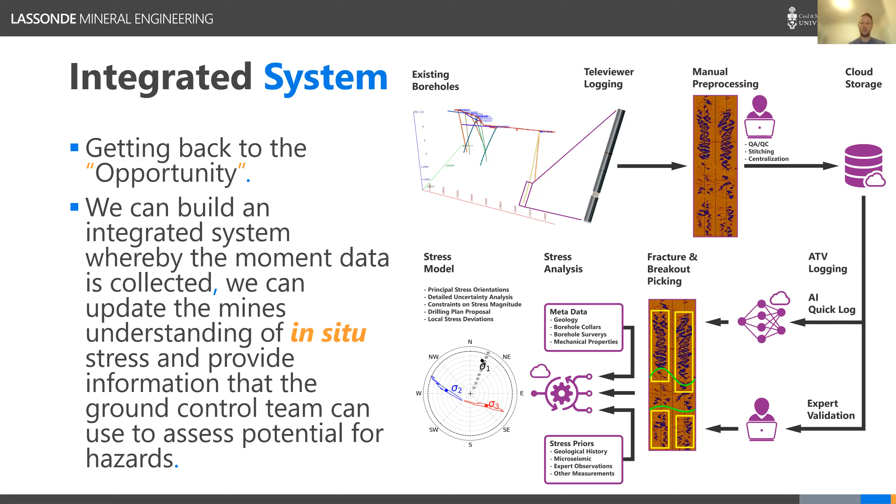Thank you, Dr. Sebastian, for that very excellent talk. So now we'll be taking questions. If anyone has any, feel free to raise your hand or enter it in the chat. We had a question a while ago from Ali. So this is probably, I think, towards the beginning of the presentation. How do you ensure that the ATV is in the center of the hole?

Yeah, great question. So one of the pre-processing steps before any fractures are picked is that there's a centralization correction that's done, because we generally expect, like in the casing area, that the travel time should be even all the way around. So there is a centralization correction, or calibration, and then also the probe itself has these kind of springs, basically. So 4 springs at 90 degrees to each other, and those press up against the rock and try to keep it centralized.